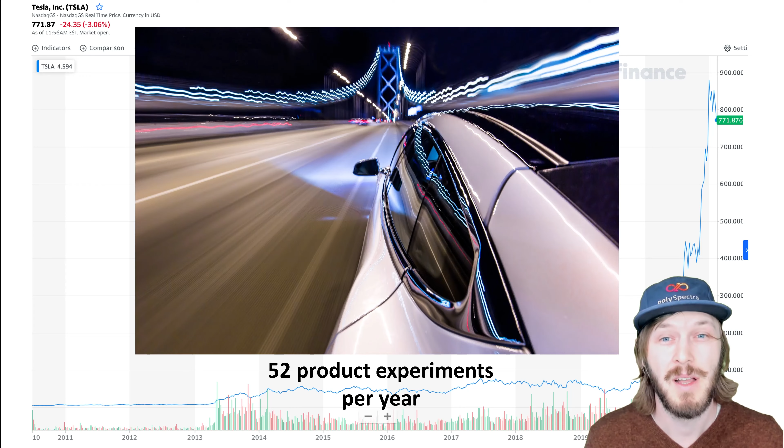And I really want to emphasize something about learning cycles, right? You call this an experience curve or a learning curve or a cost curve. It's a function of the number of units produced. It's not a function of time. So if you can turn the crank faster, you're going to learn faster, you're going to lower costs faster, you're going to get the benefits of that experience curve faster.

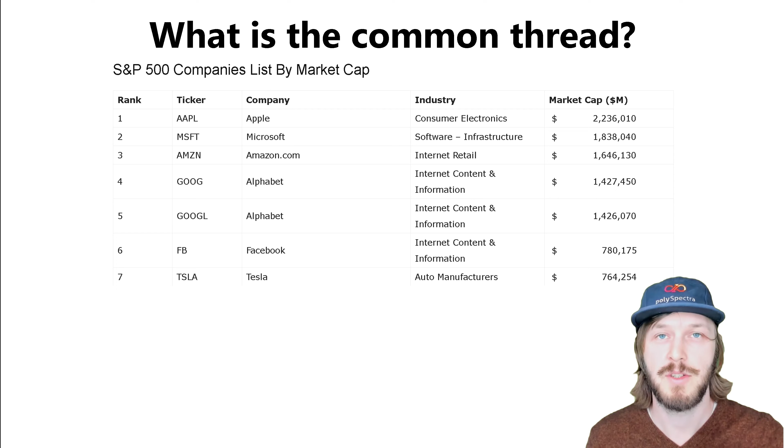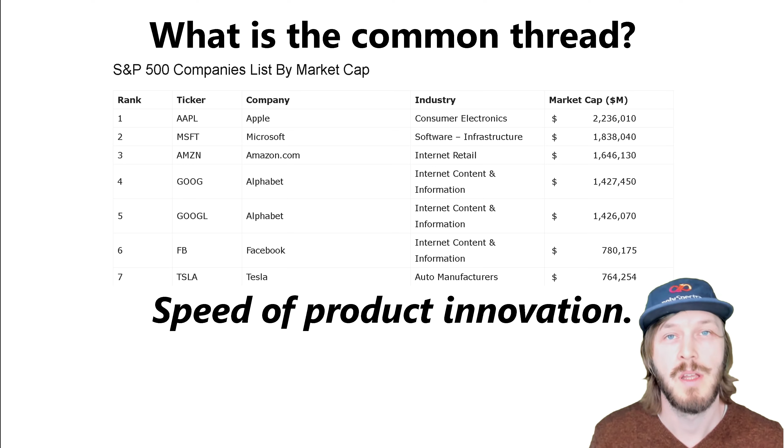So let's just look at this. Top 7, well, technically top 6, there's two Alphabets listed here, but what's the common thread? I would argue that the common thread amongst the top companies in the S&P 500 is the speed of product innovation. And you might say, well, this is kind of clustered in a certain kind of technology, digital technologies, but no one is safe. This transformation is happening across every single industry.

We're seeing it in medical, we're seeing it in electronics, we're seeing it in consumer products, we're seeing it in dental products, seeing it in aerospace, automotive components. Every single industry is accelerating, and there are folks that are going to be on the leading edge of that and benefiting from that, and there are folks that are missing out.

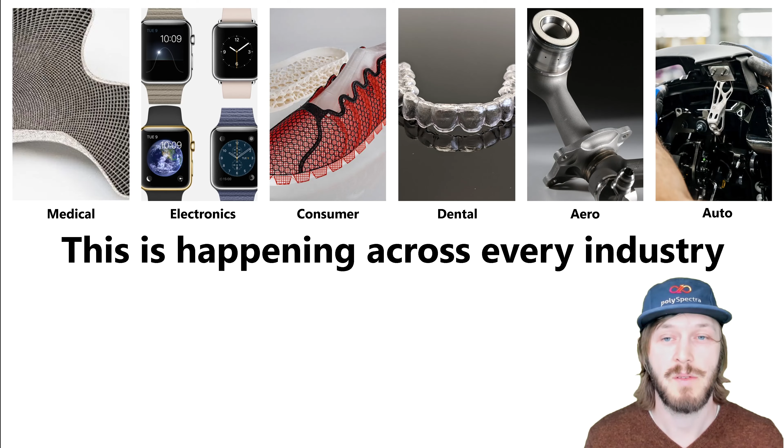It's brutal today. Customers want it all. They want it fast. They want to be immediately fulfilled with same-day shipping. They want novelty. There are infinite shelf spaces now, and the whole idea of shelf space is kind of ridiculous. So people want unique product experiences. They want high performance. They want the best in class. People will pay a huge premium for the best device, the best product.

They want to know that it's safe. They want to know it's safe for themselves. They want to know that it's safe for the environment. And connected to this novelty, people want personalization. They want it to be for them. They want it to say something about themselves.

And maybe a lot of these examples are more consumer oriented, and you might think, oh, this is only relevant to B2C or D2C companies. But let's be real, in the B2B world, companies want fast solutions right away that are tailored for them. It's equally relevant on both the B2B and the B2C side.

So in summary, we're simply spoiled by speed, okay? We want it all. We've got this infinite shelf space, and we need instantaneous delivery. But unfortunately, this promise of digital manufacturing has not been delivered. Lots of stories, lots of marketing, but it's not happening.

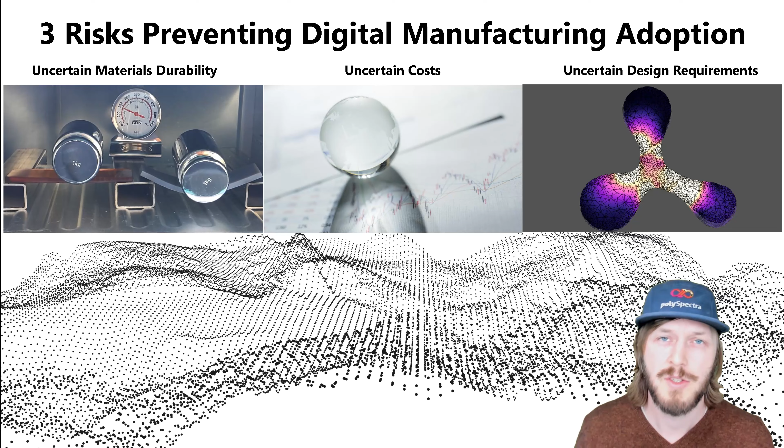So there's 3 top risks. There's 3 top uncertainties that are preventing the adoption of digital manufacturing. So the first one is uncertain durability of the materials. Think about it. We take materials for granted. It's the foundation of the physical item. It is the chemistry. Everything is chemistry. Everything is connected to the chemistry of the material.

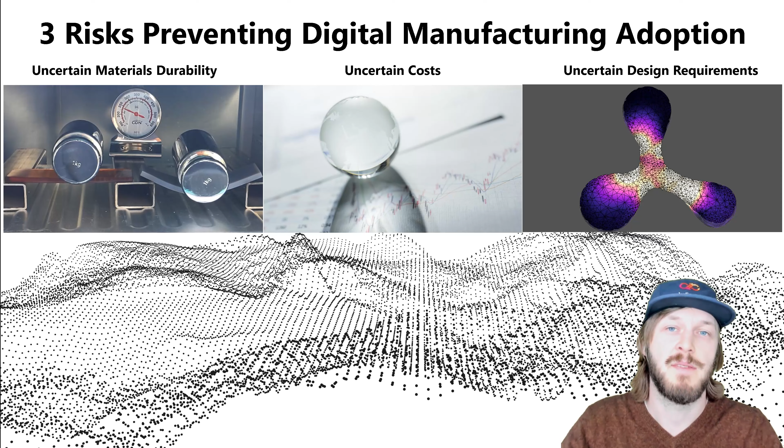And if you can't trust that to survive, then you are not going to make a production product that's going to break on your customer, or going to cause safety issues, or going to reduce the warranty of a high quality, high performing product. Second, uncertain costs. So this is the financial foundation of any business decision. You can't bet on something if you have too much uncertainty around the cost.

And the third is uncertain design requirements, right? So if the materials uncertainty is about the underlying durability, the design is uncertainty around what is it going to take to achieve the function that you want of that product.

And while there's a really widespread adoption of what you call rapid prototyping, and you can buy a decent printer for a couple $1,000 and you can print things that look like what you're going to make, there are very, very, very few teams that know how to design for additive manufacturing and know how to make that transition from, let's say, injection molding to direct additive manufacturing of production parts.

So let's go through risk number 1, materials durability. This is something extremely close to my heart as a materials chemist. But the bottom line is that 3D printed materials typically lack the durability of traditionally manufactured materials.

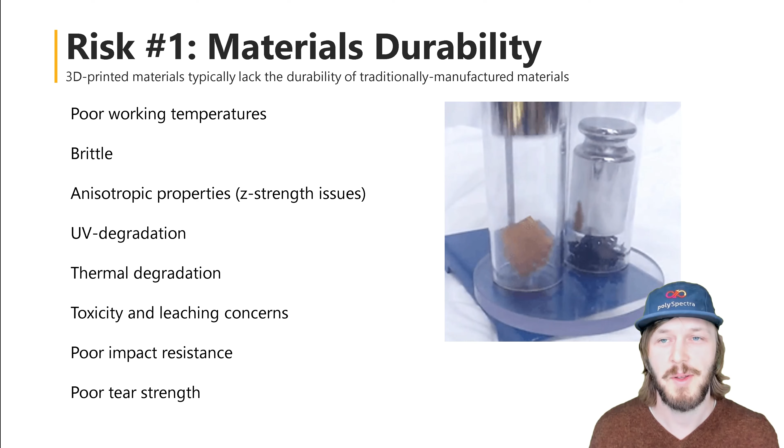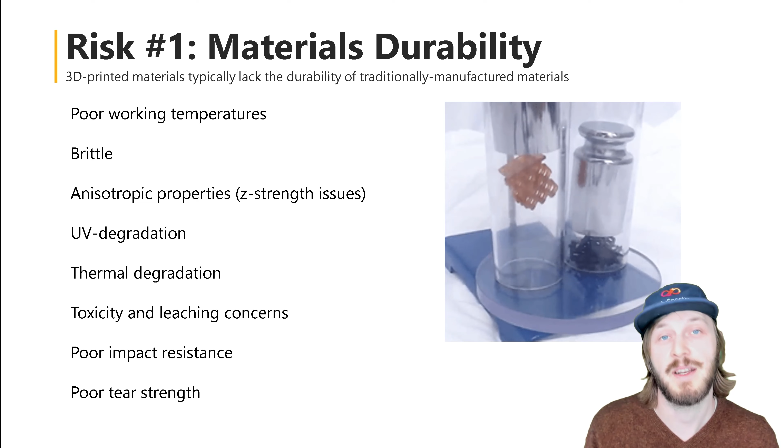So we're not out to start any fights here, but let's just say that this supposedly engineering grade material in black on the right side of the screen is quite easily crushed by a pretty simple low impact force, and COR Alpha is happily bouncing around, going along for the ride. So this is just a visceral way of displaying the brittleness, the lack of impact strength, the weakness and overall lack of durability of the typical materials.

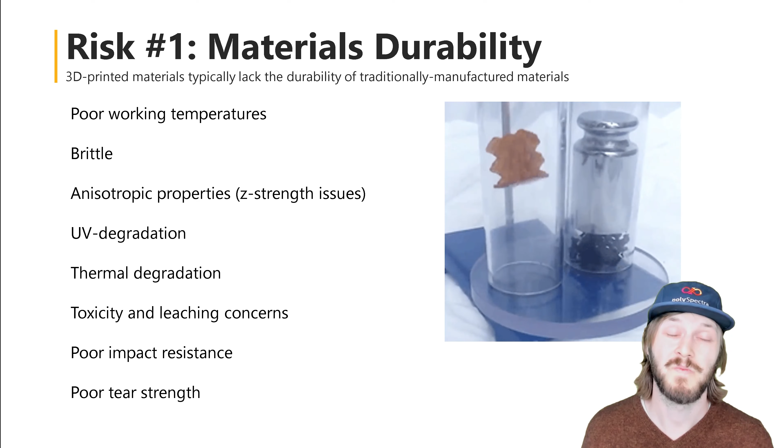So that extends to poor working temperatures. That extends to UV weathering. You can't put these things outdoors. That extends to thermal degradation if the temperature is cycling.

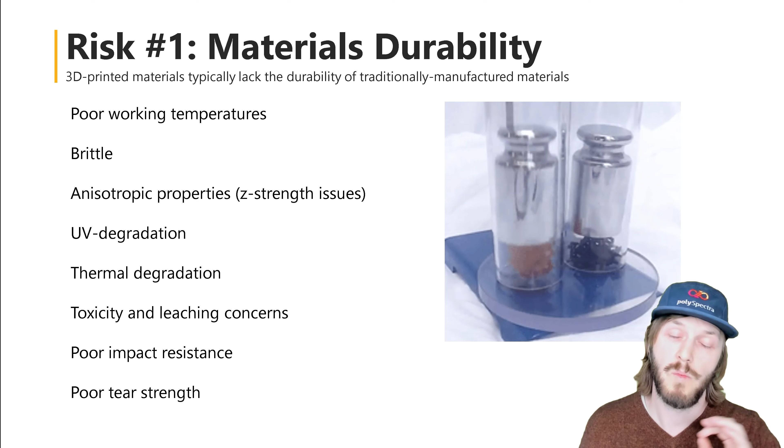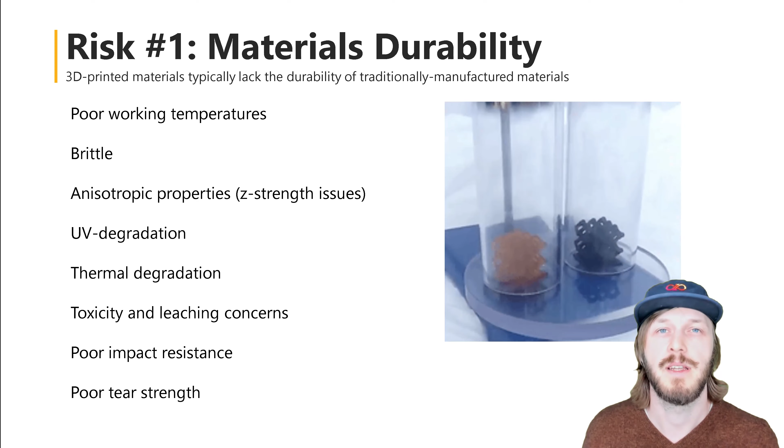I won't go down the rabbit hole of the biocompatibility, the toxicity, the leaching concerns of the traditional 3D printing materials. But these are really not materials that are capable of having the basic properties that you take for granted in any polymer product in your everyday life. And that's to be tough, to withstand high temperature, to be safe for you, to be safe for your body.

Okay, so again, this is the founding problem that we set out to solve at polySpectra. And you can see here that there is a very big white space in terms of materials that can do tough and hot at the same time. I don't see very many.

Again, I don't really like to spend a lot of energy knocking other people's products, but the brutal reality is this chart hasn't really changed in 5 years. There are very few materials that have the ruggedness required to do direct production additive manufacturing of parts that are going to displace injection molding.

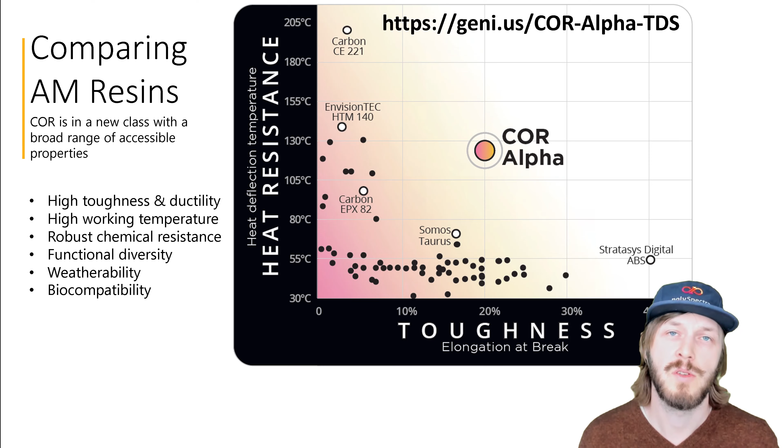I'm going to highlight just a few here and share that we feature very high chemical resistance, low water absorption, high working temperatures. The thermomechanical properties are rugged and durable. We can retain most of the impact strength of the material across a really wide range of temperatures, from cryogenic temperatures to temperatures that would get you, let's say, under the hood of a car.

We have perfect grade 0 ISO 10993-5 cytotox score. Very good dielectric properties. This is an amazing insulator with very, very low loss.

Very impressive ultimate tensile strength and elongation at break, which I might mention is something that we can tune for our customers to meet your application needs.

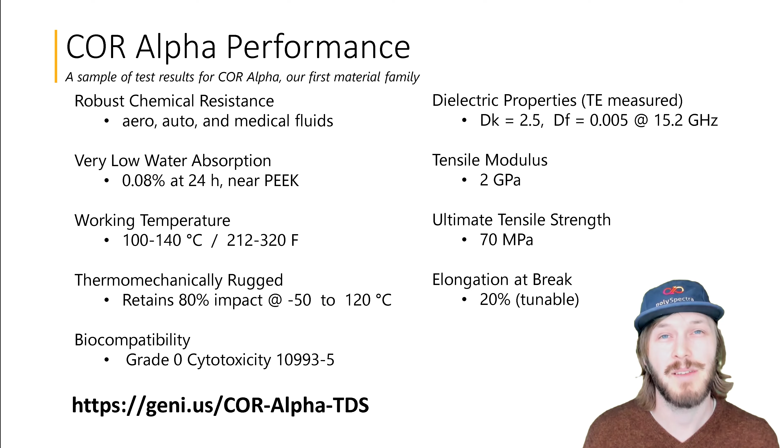That is how we are approaching solving this materials uncertainty, giving a really strong and rugged foundation for the material that we're going to be manufacturing out of.

Let's go to number 2, cost uncertainty. There's going to be two camps of folks watching this video. There's going to be a group that is doing a lot of printing, nodding along and maybe feeling a little embarrassed about how much money they've sunk into these technologies and learned the hard way about these cost uncertainties. And maybe there's a second camp that has no idea what I'm talking about.

Hopefully we're going to save that second camp a lot of money, frustration, and wasted time. But just a few of the things that nobody talks about in 3D printing are material waste, extremely labor-intensive post-processing that is never shown. You always see the awesome finished product picture. You don't see behind the scenes how many little things were clipped off, how many things were smoothed and polished manually, how much gunk was manually removed.

Extremely narrow process windows—trying to do these things in-house, you have to have a room that is exactly this temperature to this temperature. You can't print in October, you can't print if the humidity is too high. These things are ridiculous. Very high failure rates.

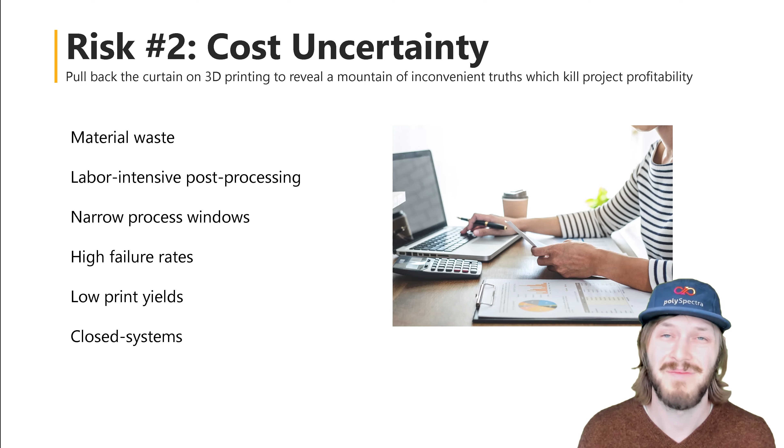So there's a lot of uncertainty on the costs, and frankly this kills project profitability. You got excited about something, you made a cool prototype of it, but the numbers aren't there for it to be production.

So how do we think about this? We think about predictable processes. We think about the chemistry, the hardware, the software working in lockstep. So from digital to mechanical to chemical, everything is synchronized.

We work extremely hard to build robust process windows, super fast, super modular post-processing, have unit operations that are automatable for those high volume customers, high yield prints with high quality process parameters.

We work in an open ecosystem. I'm not trying to sell you a specific printer. I'm happy to recommend my favorite printer to you. I'm also happy to make my resin work on your favorite printer and work with your team.

To curate a whole solution of the printers, post-processors, resin, software, hardware, chemistry—everything that is going to meet the specific needs of your production additive manufacturing operation.

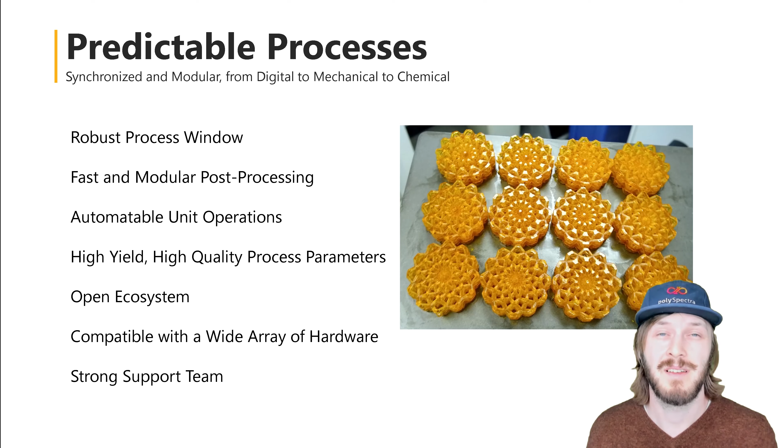And support, right? Let's work together. People need help, and a lot of the typical solutions that are out there just really lack the engineering expertise in the support teams to make their customers successful.

Finally, design uncertainty. So I said it before, design for additive manufacturing—some people call it DFAM—that is an extremely rare skill. Why? Because almost no one is designing for additive manufacturing. People are doing rapid prototyping, rapid tooling, but there are extremely few teams that are truly designing for production additive manufacturing.

This might seem easy on a more consumer, prosumer, hobbyist grade printer—automatic support sounds great, orient it, print it. But if you are really truly designing for production additive manufacturing, you need to rethink everything. The digital design piece is incredibly important, incredibly expensive, and frankly really hard.

You have to think about support structures. You have to think about things like the minimum wall thickness. Is the material that you're working with isotropic or not? Do you need to account for that in the design? What's the overhang angle that you can tolerate? Are you going to see layer lines?

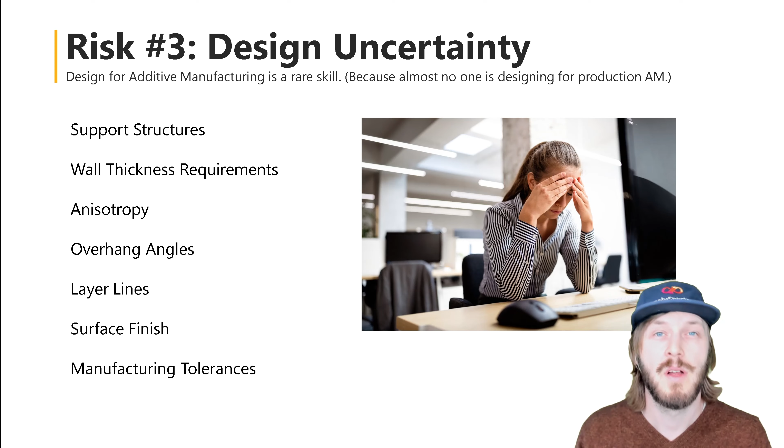Are you going to have the surface finish that you want straight out of the printer, or is there going to be some post-processing to achieve that? Are you going to hit the tolerances that you want, and do you need to modify the digital design or the print process to compensate, to adjust and make sure that you're printing accurate parts with the tolerances required for your application?

So again, this is really hard. Frankly, not something that I wanted to get good at, and not something that we initially sought out to solve when we started PolySpectra, but incredibly important. So we have taken a physics-driven approach to digital manufacturing, to design for additive manufacturing, and we've spent a ton of money getting good at this out of necessity, because we realized the hard way that it wasn't there. That involved hiring people from top schools, from super innovative product companies, and from other additive manufacturing companies with a lot of in-depth experience.

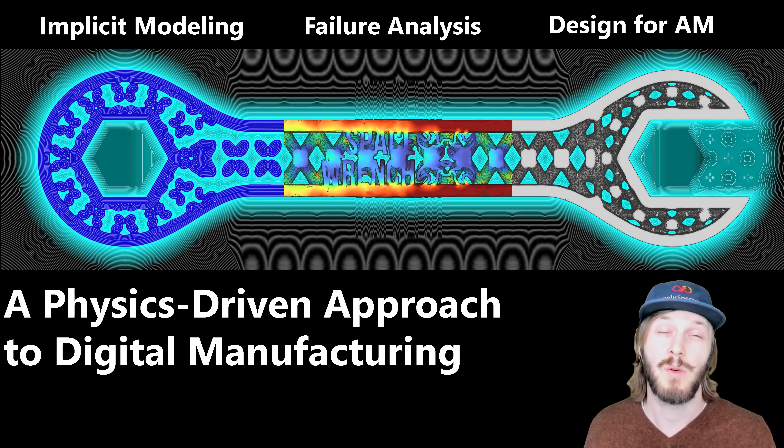So what are some of the ways that we approach this? I've included three here. One is implicit modeling, field-driven modeling, and really using math to design your parts. The second is a capability in failure analysis, so finite element methods and how to map the simulation to the true experiment, to the actual failure mode of the physical product. And third is this sort of mysterious term of design for additive manufacturing. What does that mean? It's a real skill. There's a lot of detail involved in design for additive, and it requires a completely different mindset than designing for injection molding.

Okay, so I hinted at this in the last slide. In theory, there is no difference between theory and practice. In practice, there is. So there is a big valley of death between simulation and experiment, and this is something that a lot of teams find out the hard way. It's very expensive. It's a necessary evil, so to speak, of trying to predict performance. You're going to want to make sure that you have that capability on your team, or you're working with a team that can help you bridge that valley of death from the predicted performance to the actual performance of the final part, the final product.

Unfortunately, about 99% of the problems that we have helped our customers solve are locked away under NDA. And I can assure everyone watching this that we do take our customers' intellectual property extremely seriously. So unfortunately, we can't share many of the most fun, the most exciting projects that we're working on behind the scenes with leading organizations that are adopting additive manufacturing as part of their transformation into a digital manufacturing world. But I can share that we are doing this across a number of industrial manufacturing verticals with the true leaders in auto, aero, industrial, robotics, defense, doing a lot in medical and dental, consumer products, electronics, both consumer facing as well as industrial.

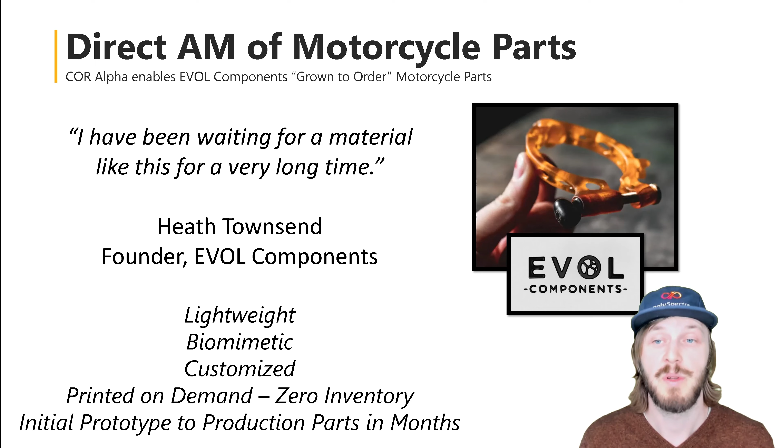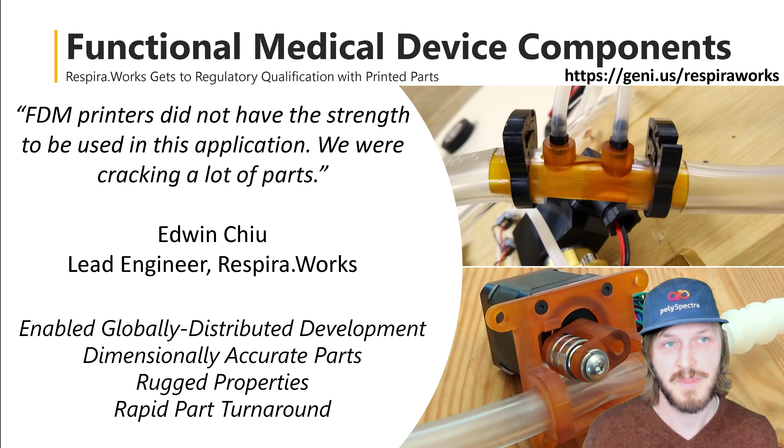Before we wrap up, I want to share a few different ways that we can possibly work together. Our job is to accelerate innovation. Our mission is to help designers, inventors, and engineers make their ideas real. And we are happy to do that in whatever mode works best for you.

We can start all the way at design. We shared a little bit of the design for additive manufacturing. If you're still working on the design, whether you are still developing it, don't have those capabilities yourself, or just want to bounce some ideas off of an expert, we can start there.

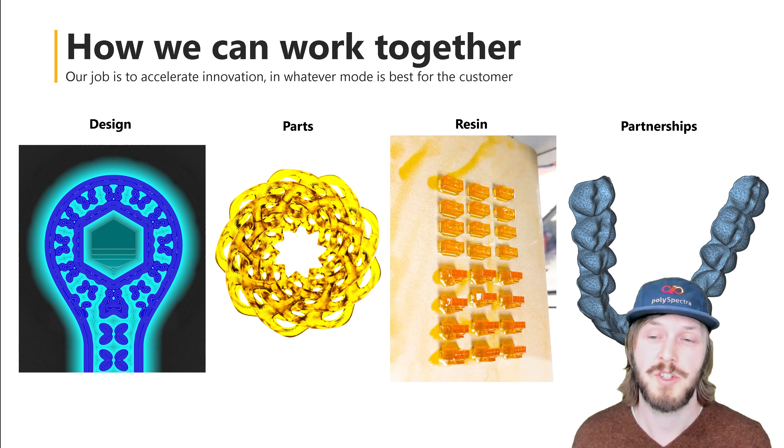We print a lot of parts for customers, quickly turn around, and show them what we can do. We bring resin on site to help our customers and their preferred manufacturers directly print their products. And we're also happy to work on partnerships where we're going to solve a really, really big problem together.